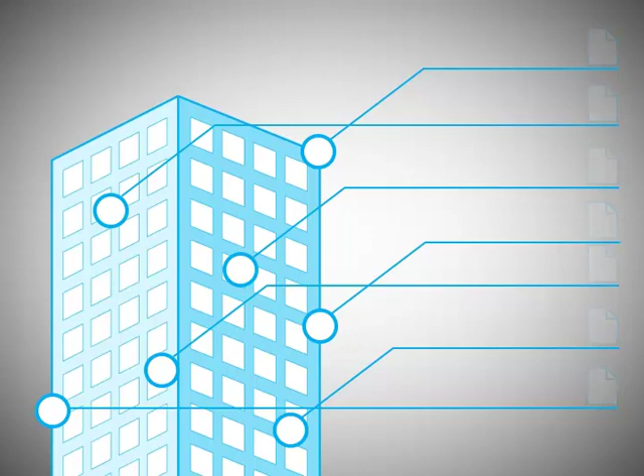For those of you who are not familiar with the concept, BIM is a generation and management process in the AEC industry, which stands for Building Information Modeling. It's a process of constructing a virtual simulation of a building which manages numerous information derived from numerous stages of building design, be it 3D modeling, construction details, and mechanical systems. BIM is an inevitable next wave of the building design process, as many buildings today not only are designed in complex form, but also require mass data information management.

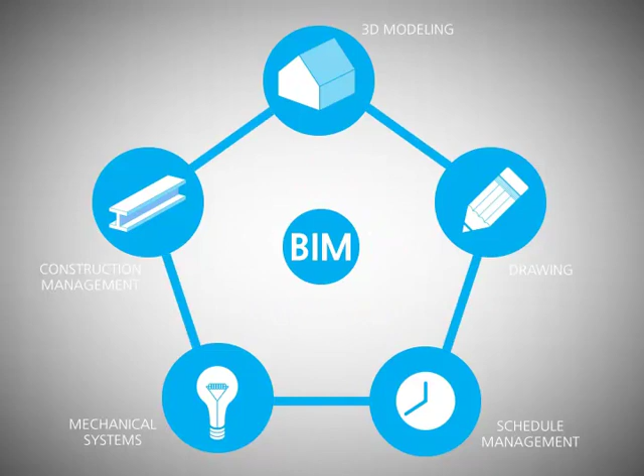Differentiating itself from the mere 3D computer modeling of the past, the true innovation of BIM comes from putting together various data and systematically managing it. Through the total integration of information, BIM not only can drastically reduce the burden of handling mass data, but eventually can extend to creating a platform that manages the entire life cycle of a building from design through construction and even management.

This is why we started the K-BIM initiative 2 years ago. As a project issued by the Korean government to develop a world-class BIM software, Virtual Builders was given approximately $4 million and 2 years of development time.

So today, I'm thrilled to introduce our latest developments from Virtual Builders. They are an easy-to-use modeler, a powerful checker, and an effective collaborator. A proud result of the K-BIM initiative of the past 2 years, we believe that these 3 solutions will be some of the most innovative BIM solutions out there, and we are calling it the Abimo platform. While fully encompassing the effectiveness of BIM, these solutions are much easier to operate compared to other existing BIM software. It is powerful yet user-friendly.

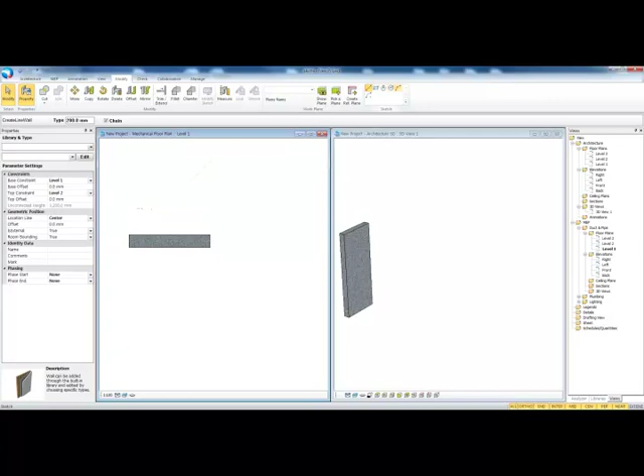So let me start with the modeler. The Abimo modeler is designed to model various types of building components. With the support of Parasolid Designer, the user of the Abimo modeler is able to model from the very basic architectural elements to the most complex geometries.

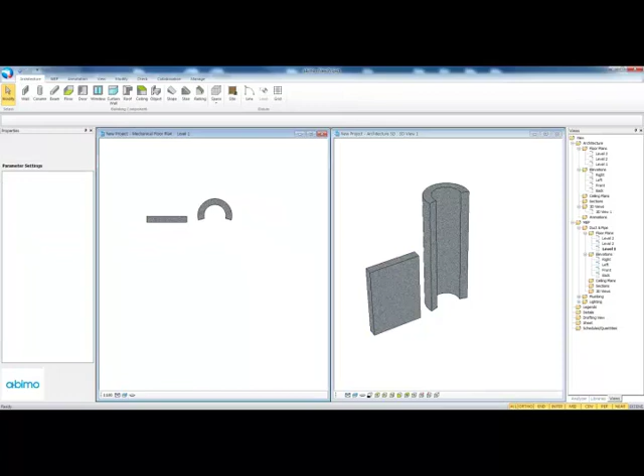By simply choosing a building component category from the menu, the user can easily start modeling the desired structure in a 3-dimensional virtual space. Modeling in the Abimo modeler can be roughly classified into 2 types: linear type modeling and planar type modeling. Linear type modeling is where elements are modeled through clicking start points and end points. Through defining starts and ends, and eventually defining lines, certain elements are modeled according to the direction and length of the vector. Elements modeled through linear type modeling include walls, stairs, ducts, or pipes.

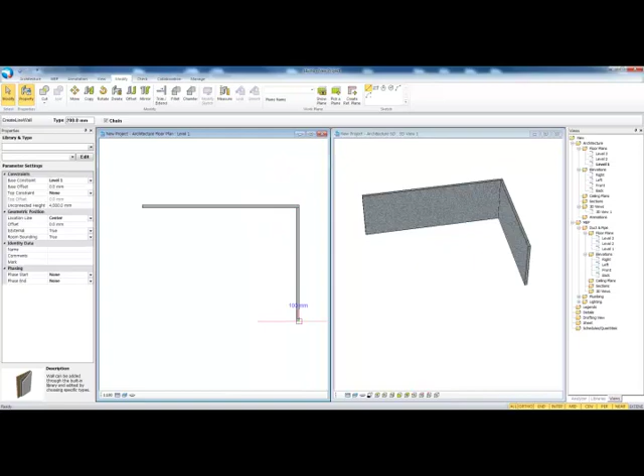Planar type modeling is executed through defining a certain outline of an area that defines the outline of the element you'd like to model. Here, you are automatically switched to the modifying mode, where you can edit or delete outlines before you click apply for it to get modeled into the actual element. Elements modeled through planar type modeling are floor slabs, ceilings, roofs, spaces, etc.

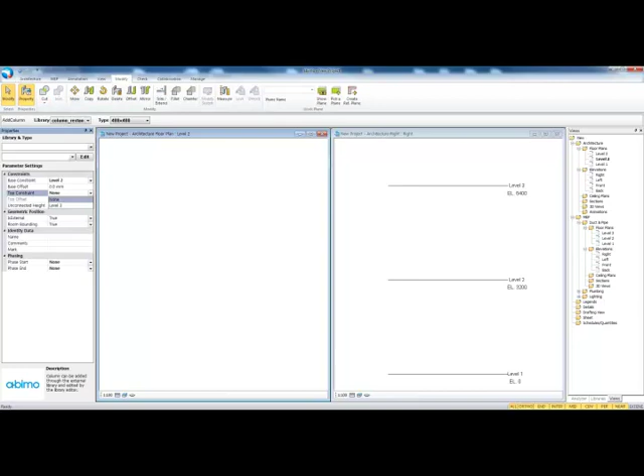Every element modeled in the Abimo modeler is tied to a certain level parameter. This means that each model is associated with a level, and its form, dimensions, and existence depend on how the level is defined. Take this column for example. In elevation, you can see that the base is constrained to a certain level, in this case level 2. On changing the base constraints, you can see it moves to a different level. By setting a top constraint, you can also link the top of the column to a certain level as well. And of course, when deleting a level, elements tied to that level are deleted with it.

Certain elements can be loaded from the library and inserted into the project. Here's an example of loading an escalator from the library and placing it into the project. Customized elements can be modeled in the library editor by the user and loaded back to the project.

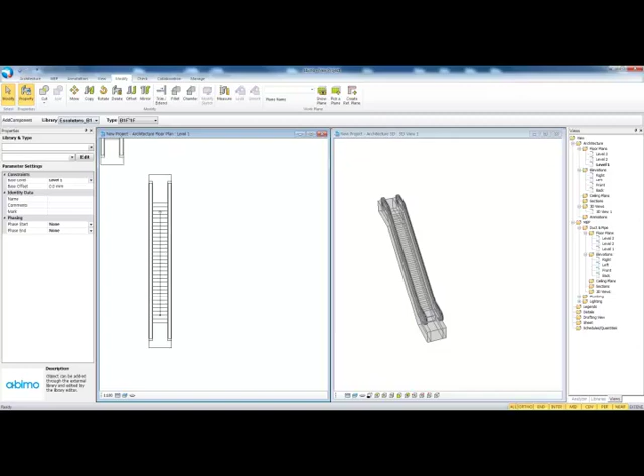This is an example of a project model from the Abimo modeler, from scratch. You can see that all levels are showing modeled space of each story. Different elements are mapped with different materials. The main modeled elements include walls, floor slabs, columns, and beams. There are also other elements such as windows, curtain walls, stairs, and escalators, all modeled with the Abimo modeler.

Models in the Abimo modeler can be displayed in different types of visibility modes, such as hidden lines, wireframe, X-ray, shaded, or realistic. And now the Abimo checker.

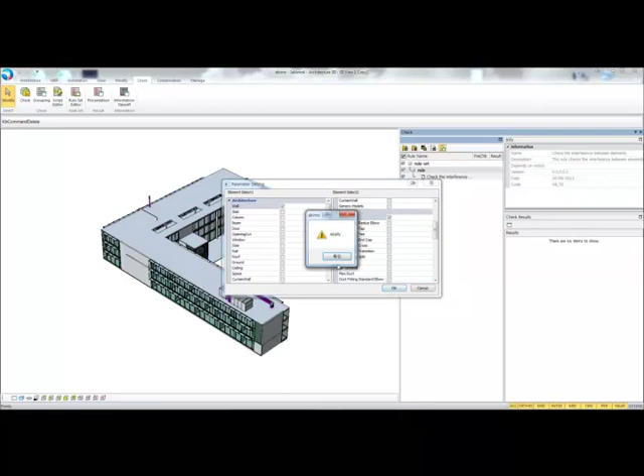The Abimo checker is a platform on which you can check the model project to see if it meets certain requirements, such as building regulations, area requirements, or rules for handicapped accessibility, and so on. Not only does it validate regulations, but it's also capable of checking physical conditions, such as interference between elements or connection validities. Here I will check to see if certain elements run into certain other elements.

After opening the project that I want to check, first I'll start with loading a pre-customized rule set. A rule set is a file made up of a combination of different rules for you to check on your project. In this case, I've set the parameters so that it checks the interference specifically between walls and ducts.

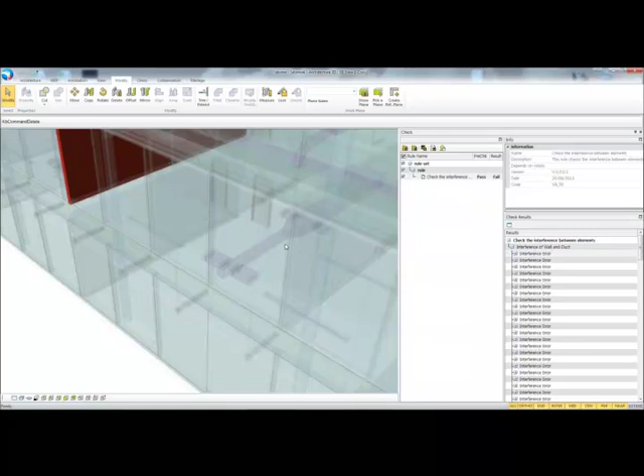After loading the rule set, you click on the check button and the checker will automatically check the model and show the checking results on the check results window. By selecting detected particular elements on the check results list, the elements are highlighted in the model.

Checking if mechanical elements like ducts or pipes are connected to each other. This is an example of checking physical conditions of a model through a coded script.

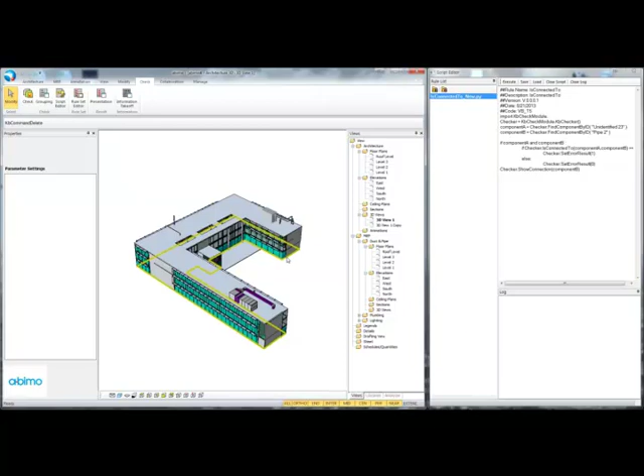By clicking on the script editor, you are able to load Python scripts that are written to check various conditions of the model, and in this case, the connection conditions of ducts. By simply typing in the ID of the ducts you want to check into the script, it automatically figures out the result for you.

Here you can see that the result showed a true status, which means that the ducts I've selected are connected. The fact that the abimo checker can run scripted rules to check the model shows how flexible it can be to accommodate various regulations.

Also, with the rule set editor, you can edit and combine different rules to create your own set of rules. So the significance of the abimo checker is that it's highly adjustable and can be customized to nearly any type of rule imaginable.

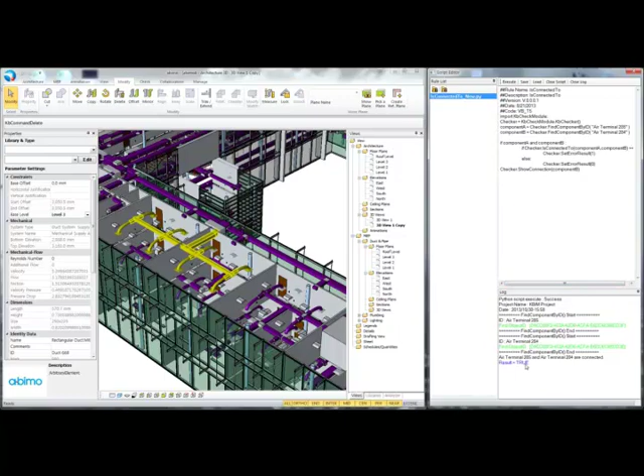The abimo collaborator is a powerful collaboration system which lets you share a project with multiple collaborators. After connecting to the abimo server, the user can create a group for the team you're working with. By assigning each individual with different levels of authority to the project, you can set up an efficient working system for multiple people to collaborate.

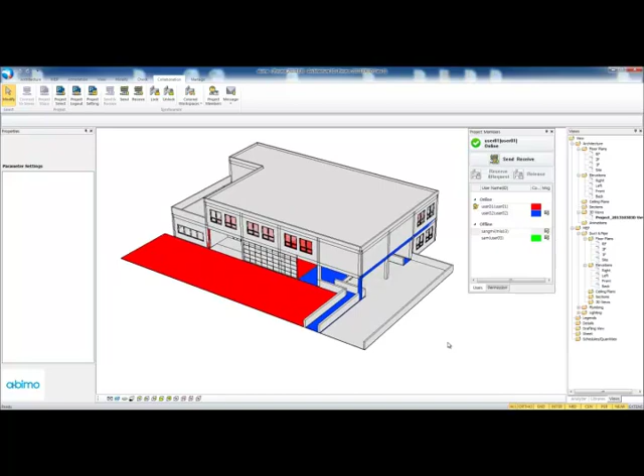A project can be uploaded to the abimo server by one of the collaborators for the other collaborators to download. Once downloaded, each collaborator can be assigned with an original color of their own, and in a modeling process, each element added by a certain collaborator can be displayed by the original color the collaborator is assigned with.

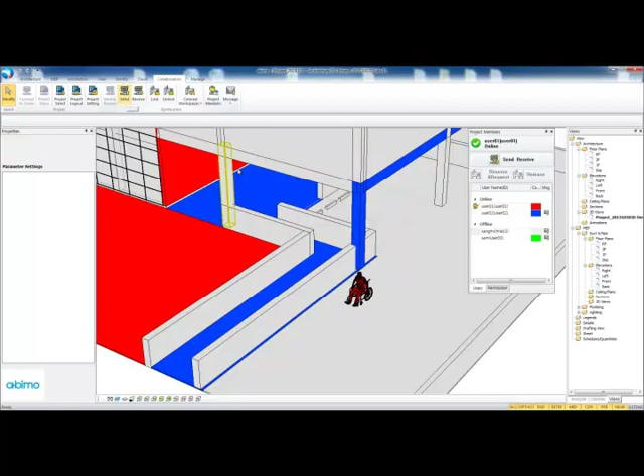Through the color coordination, different actions executed by different collaborators are visually expressed in the model to prevent confusion and to bring clarity to the collaboration process.

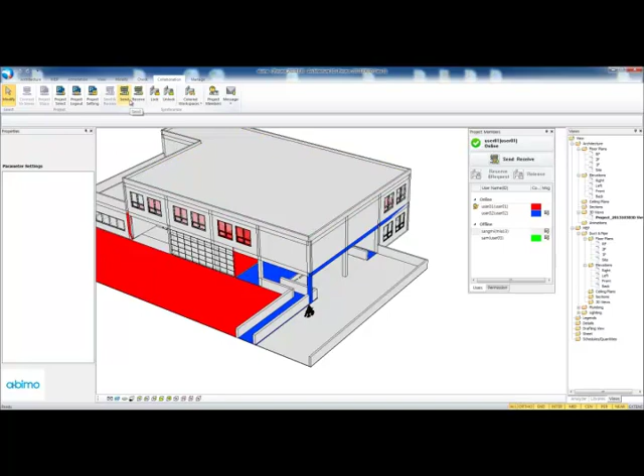Changes in the model and other updated information of the project is sent and received with the collaborating group so that you don't have to go through the process of re-downloading the entire project again. Also, certain elements in the project can be locked or reserved through the server. This prevents conflicts that can occur when multiple people are working on the same element.

There are also small perks in the abimo collaborator system as well. This integrated messenger, for example, can be used as a general communication system among the collaboration group.

So today, I've had the privilege of introducing the abimo modeler, the abimo checker, and abimo collaborator to you. But there's another thing I'd like to introduce. In fact, it's one of the most important things about our solutions I'd like to introduce today. It is the fact that the abimo modeler, the abimo checker, and abimo collaborator is actually one thing.

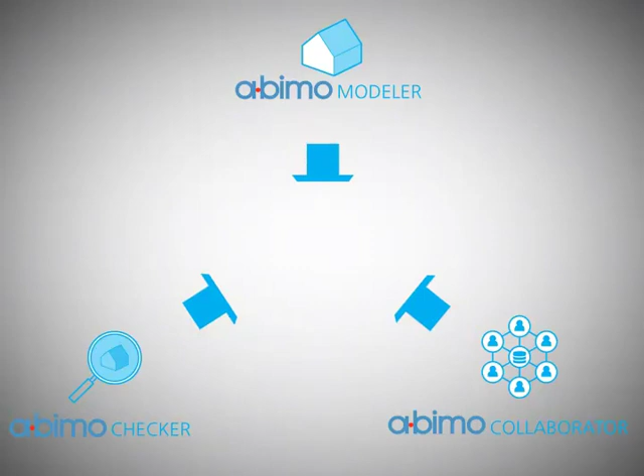The modeler, checker, and collaborator are all integrated into a single platform called abimo. This is to provide you with a totally synthesized experience of an integrated modeling environment.

For instance, in the abimo environment, there is no need for you to export your project out to other platforms to check your model. It is all done within the same window. Here you can see that I am loading the checker platform on the same window that I was modeling.

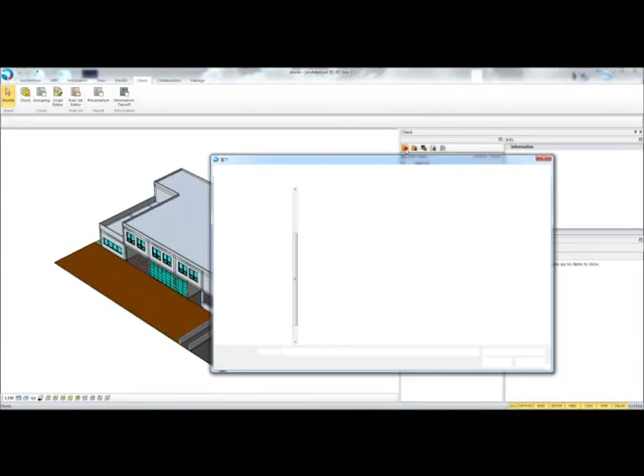After checking certain rules, and when errors are detected, I can simply edit my model in the same window and check again with the checker to see if the error has been fixed.

Having multiple solutions in a single platform does not only save your time and effort, but also saves the inevitable data loss that happens during the process of converting a file into different file formats. We believe that the integrated environment of abimo will drastically improve work efficiency of a typical BIM process.

Of course, this doesn't mean that abimo isn't compatible with other BIM solutions. Although we strongly believe in the integrated modeling environment that abimo provides, we also understand that file importing and exporting is inevitable most of the time during a BIM process.

This is why we've developed abimo to be fully compatible with other file formats that are conventionally used in the BIM industry. In fact, abimo is one of the most open platforms in terms of file compatibility, as it is capable of importing and exporting DWG and DXF files, as well as importing Collada files.

It also fully supports the importing and exporting of the international standard IFC format, which makes abimo compatible with most of the BIM softwares in the industry.

Virtual Builders is extremely proud of what we've come up with, and both pleased and honored to have had an opportunity to show it in front of the AEC community. We believe that abimo will be one of the most powerfully efficient BIM solutions in the industry, as well as a competent partner for the other BIM solutions.